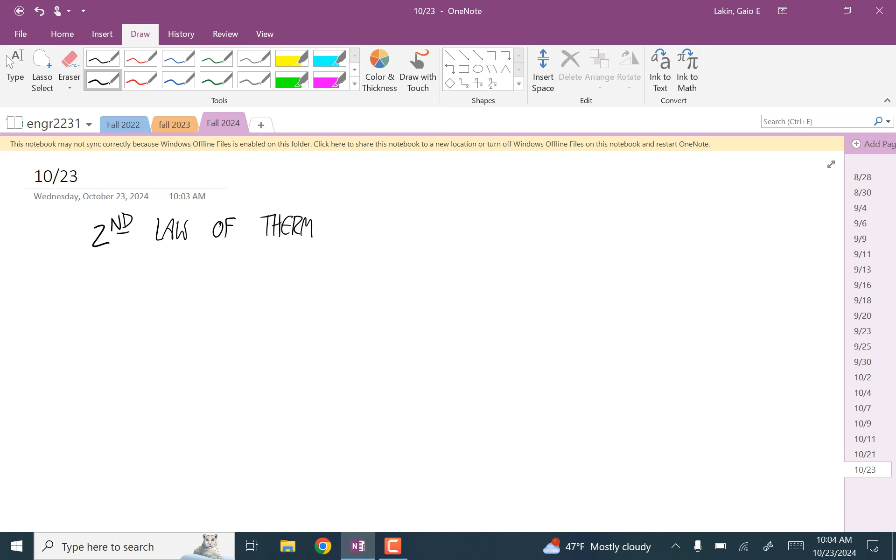So guess what we're starting today? The second law of thermodynamics. And this is a cool one. Some parts of it aren't that cool, but the parts involving entropy are. And this is going to give us two new, I guess, abilities, things we haven't been able to do with the previous approaches.

The first one is calculating the efficiency of cycles. And the second one is, it's funny that we haven't been able to do this, maybe you haven't thought about it this way with conservation of energy before, but this gives us the ability to calculate the direction of processes.

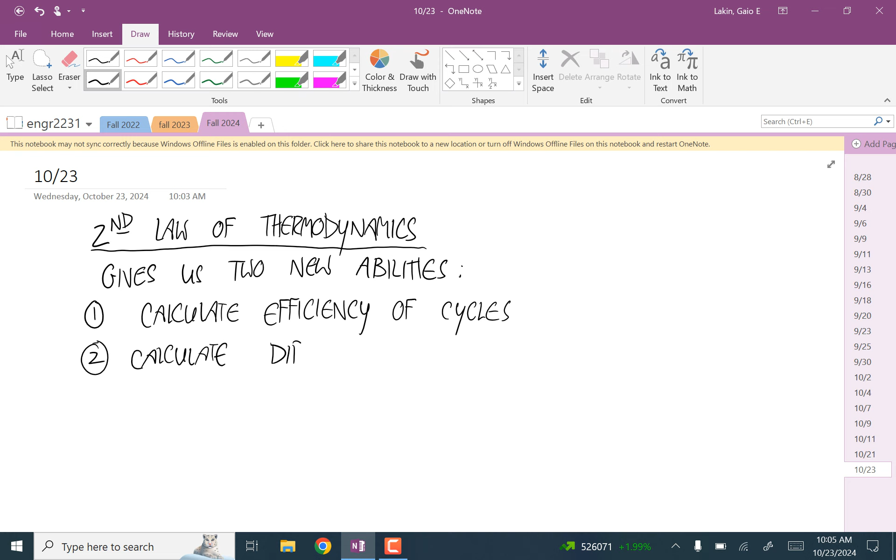Because we've just been given it. Yeah, so I suppose it wouldn't matter either way, right? Well, so like if you think of a simple conservation of energy problem, like somebody on skis without friction, skiing down a hill, you go through conservation of energy and calculate their speed at the bottom of the hill. But we don't actually, we're just told they start at the top and finish at the bottom. There's nothing about it that says that. And actually, we could use the exact same equations to say, what if they're going this fast at the bottom? How far up the hill can they get? So there's nothing to specify this happens first and this happens second.

The second law of thermodynamics is going to give us that ability. With the ski thing, it really doesn't matter, it's the same equations. Well, it turns out that if you could use conservation of energy to say, okay...

Say you take a hot lump of metal and you put it in some cold water. You can calculate what the equilibrium temperature of the metal and the water are going to be. But nothing we've talked about so far says that it starts with them at different temperatures and ends with them at the same temperature. Intuitively, we know that's the case, but as far as conservation of energy is concerned, the first law of thermodynamics, it's just as possible for you to put these things at different temperatures together and for them to separate into a hot thing and a cold thing, even though we know that can't happen. Well, the reason that it doesn't happen is the second law of thermodynamics.

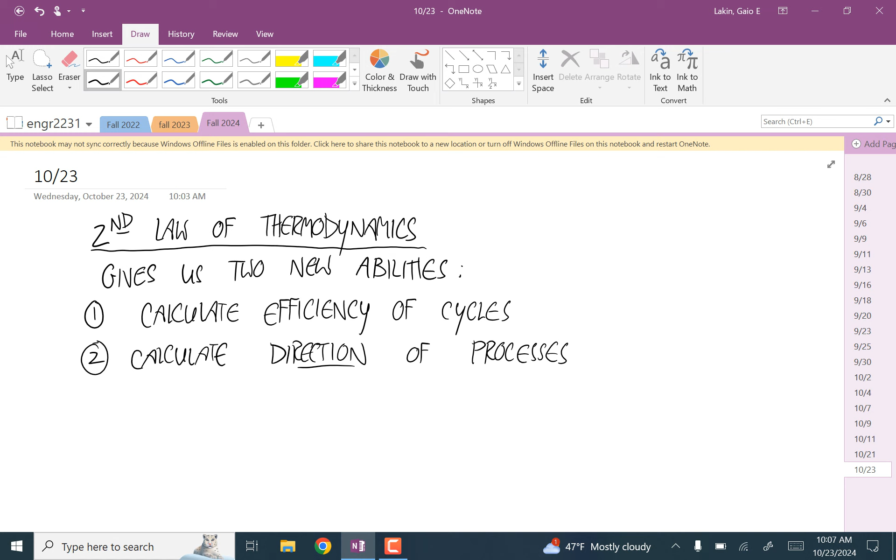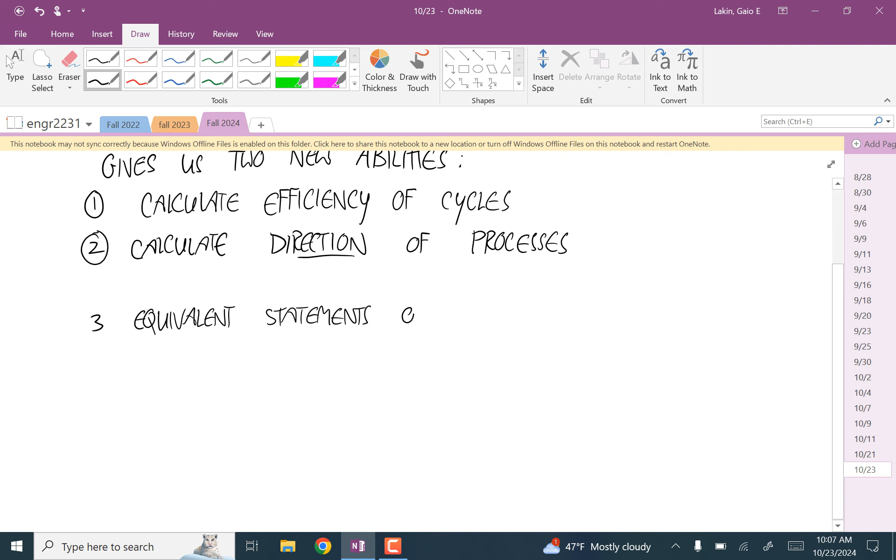There are three equivalent statements of this law. So there are three equivalent statements of the second law. The first one is the most intuitive, and we're not going to use it exactly, but you can show, and it's not too complicated, but I'm not going to go through it, how this is equivalent to the other two. But this first one is called the Clausius statement of the second law.

And this one says that heat, remember heat is energy, it's a change in energy due to a temperature difference, and this says that heat only moves spontaneously from a high to a low temperature.

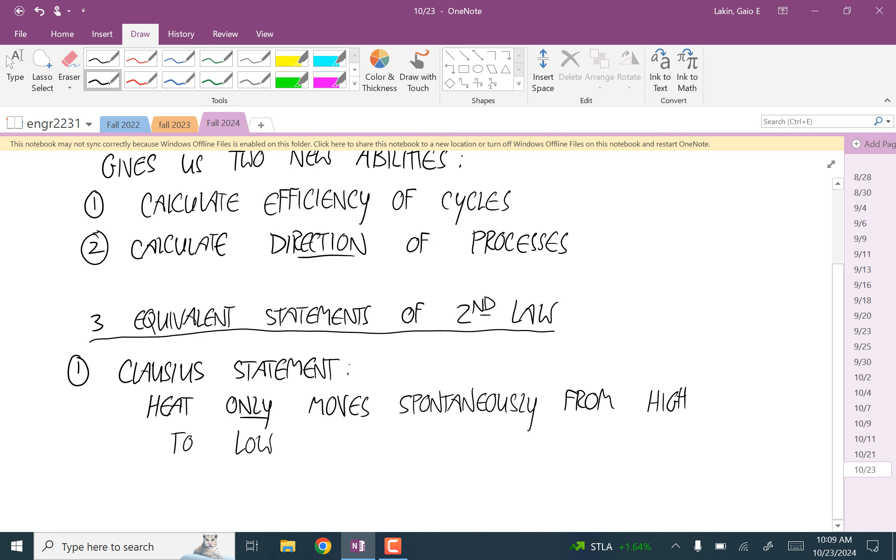Okay, so this is totally intuitive. I mean, if you put your hand against a cold window, the reason it feels cold to you is because energy is leaving your hand going towards the window. If this Clausius statement wasn't true, you could sometimes put your hand on a cold window and it would feel hot because energy was going from the window to your hand and the window was getting colder. Okay, so this is totally intuitive, totally makes sense.

You would have been able to make this statement yourself, so I don't know why Clausius is so great. But the only reason I bring this up is kind of to ground you to the other ones. This is all the other ones are saying, they've just figured out some cool, different mathematical ways to approach it that end up being super useful. But this is the intuitive one.

Clausius, a physicist? No, I think he's the guy who brings us Christmas presents, isn't he? Romans said that. Santa Clausius, the Santa Clausius statement.

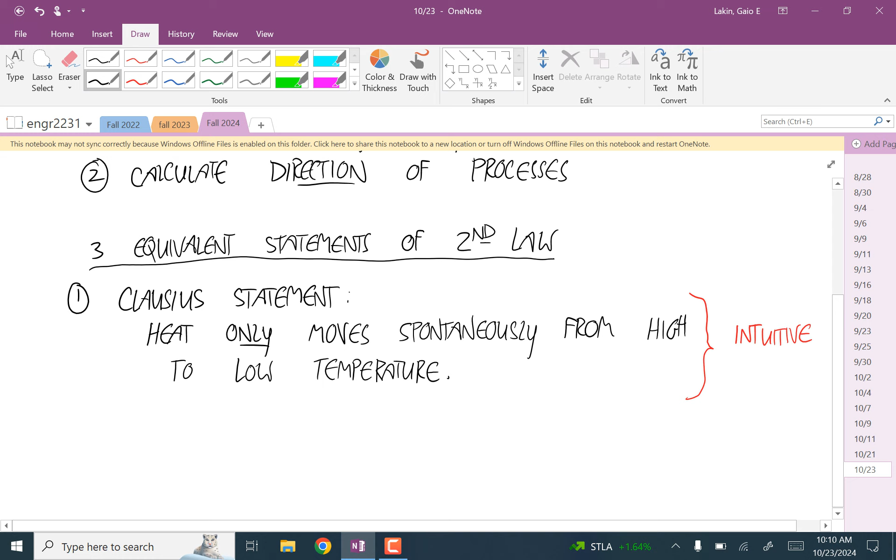But now we'll get to the two that actually have mathematical uses for us. The second one is the Kelvin-Planck statement. Planck.

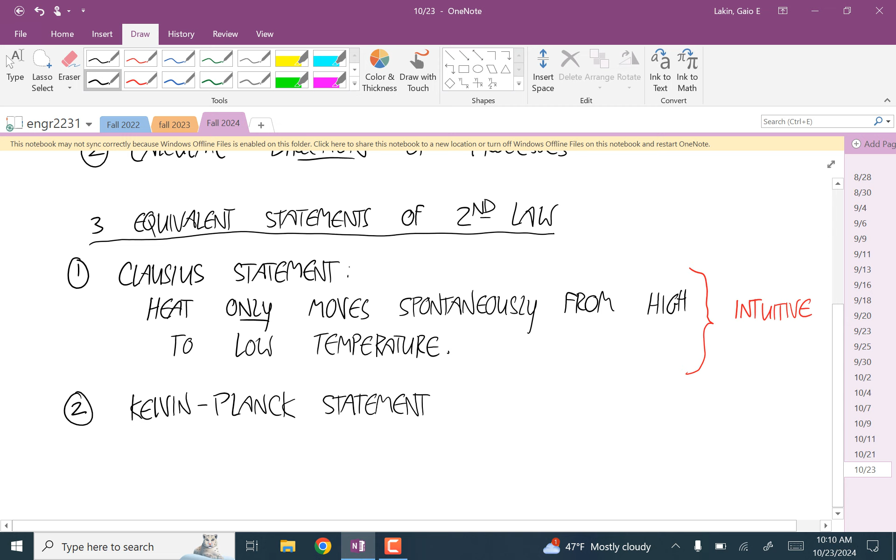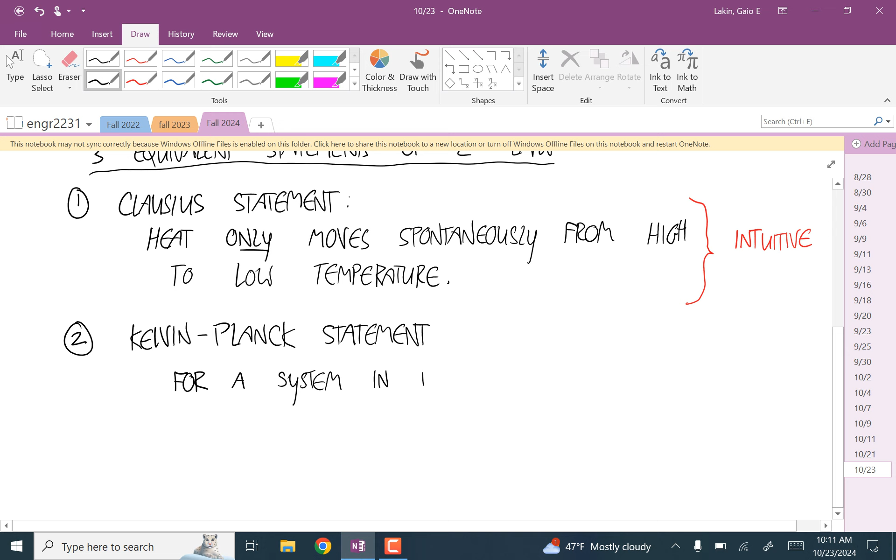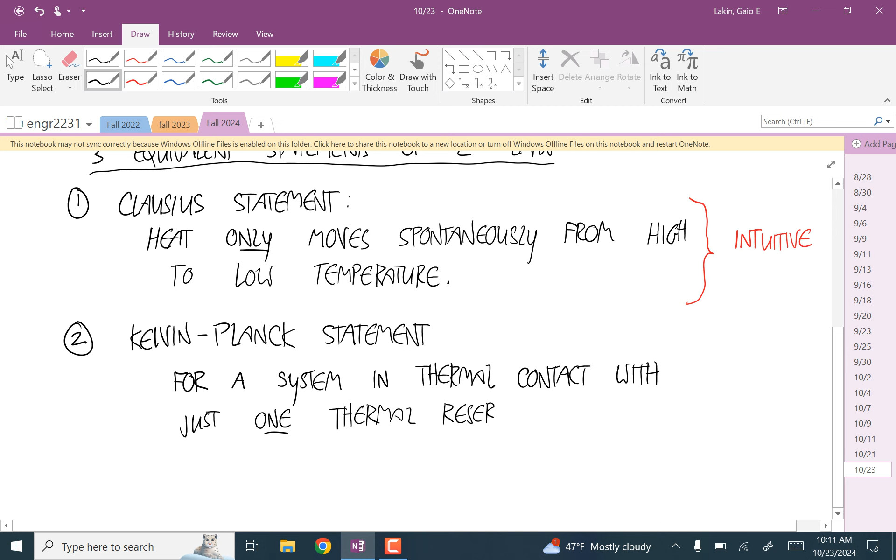And this one says, okay, so this goes, there's a big jump in the complexity of what this is saying compared to the first one. But for a system that's in thermal contact with just one thermal reservoir, the work produced by the system over any cycle is less than or equal to 0.

Okay, so let's think about what this means. So a thermal reservoir, you can think of that as like a giant ice bath that's keeping something at a low temperature, or you can think of it as a boiler with a fire burning that's sort of an endless supply of energy as long as the thing stays below that temperature. So for the purpose of this, let's think about this thermal reservoir as being a boiler, like a fire. And what does it mean for W for the cycle to be less than or equal to 0?

So think about the sign convention of W. If the system is able to do work on the surroundings, then that would be positive.

So what this is saying is, if all you have in your power cycle, in your power plant or whatever, your engine is a hot engine, all you're doing is shoveling coal into it, you can never get that to be a cycle and still do work. You can never get it to return back to its starting state and still be outputting work. You can get it to return to its starting state, but then you have to do work on it.

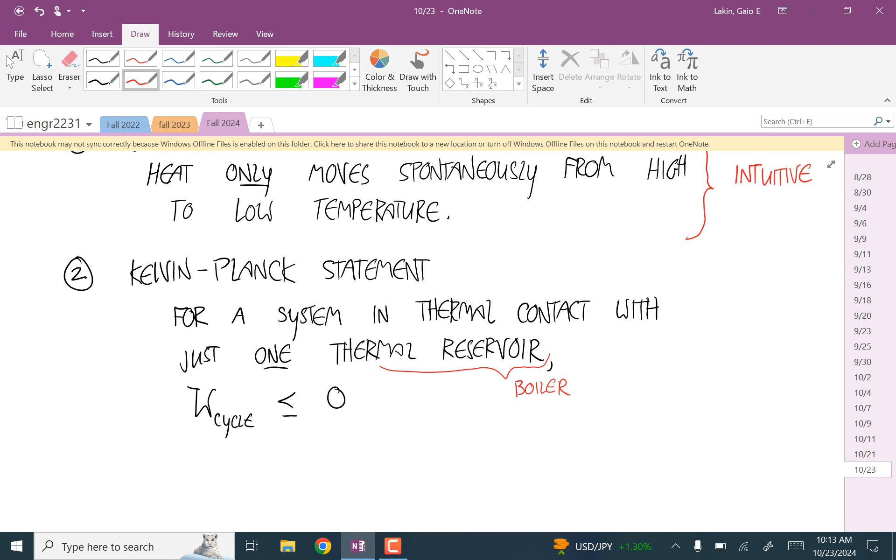So is that basically saying the efficiency can only ever be 100% maximum? Is this sort of a statement saying you can't have perpetual motion? Or is it a little stronger than that?

It's actually saying, so here's how to think of this: you can't have all the heat from a power cycle go into work, go into producing work. Some has to be lost in exhaust.

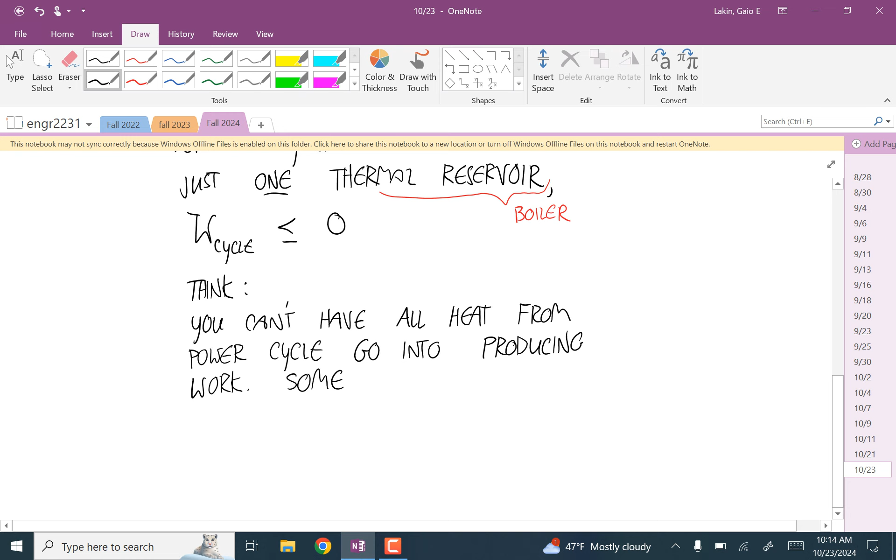So how does it say that? Well, this exhaust is, think of this as a necessary second thermal reservoir, because heat is always being lost to the surroundings. It's actually saying even if you have perfect efficiency, you can't run a power cycle without using a cold reservoir to sort of attract the heat flow, is basically what it's doing. You can't just pump energy into this system through heat and have it all produce work with perfect efficiency. You have to get that heat moving in a certain direction by also having a cold thermal reservoir.

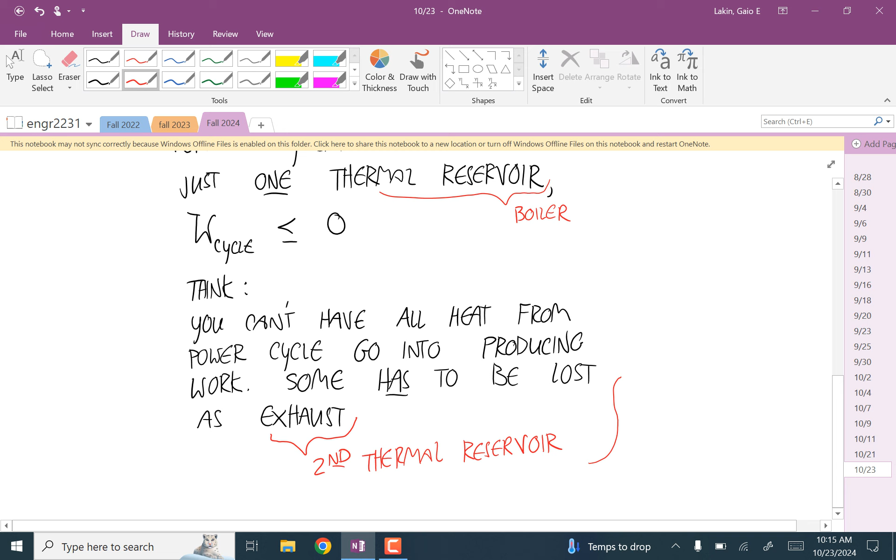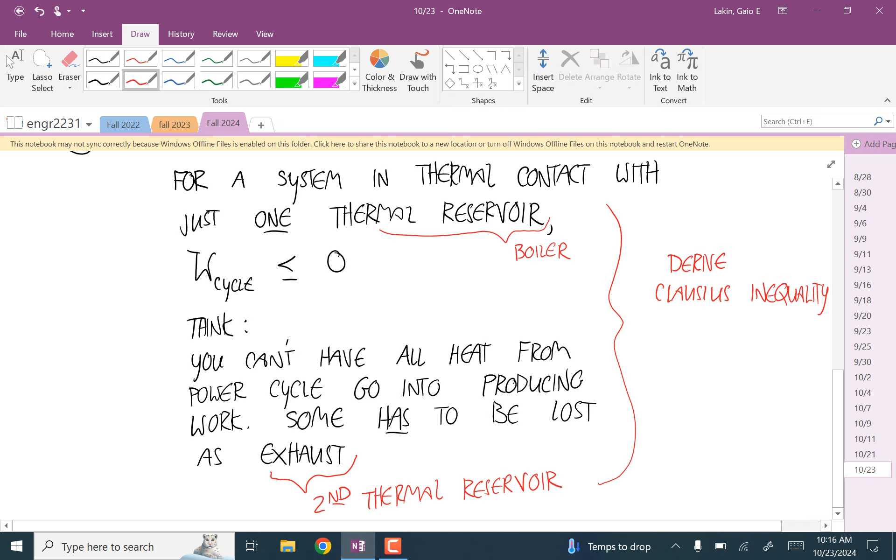And what are we going to use this for? The benefit of this statement is we're going to use it to derive what's called the Clausius inequality. This is a pain, kind of, but if you had to think about which one of these statements of the second law of thermodynamics you're going to derive the Clausius inequality from, you would certainly think it was going to be the Clausius statement, but it's not.

So just be aware of that. The Clausius inequality and the Clausius statement are totally different things. It follows with thermo logic. And then we're also going to use this to derive the entropy statement. Well, the definition of entropy, and the entropy statement of the second law.

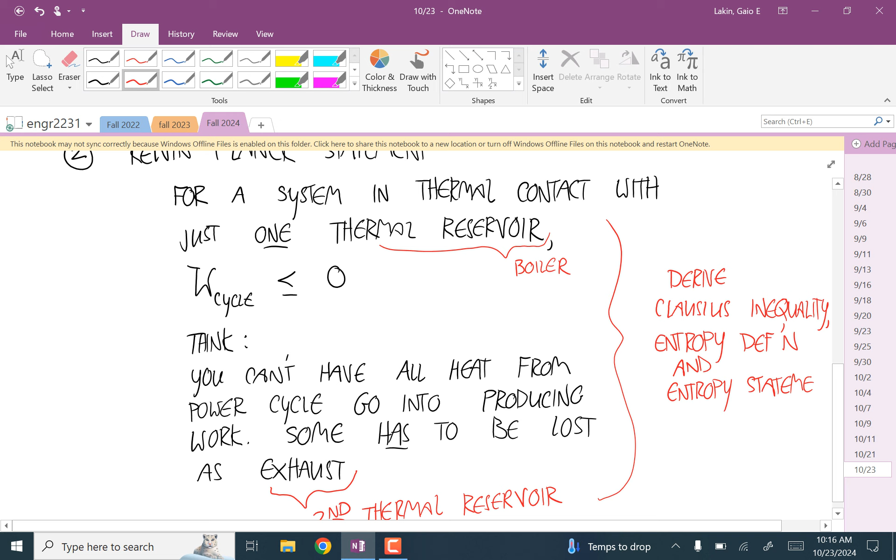And then the third one of these is the entropy statement, and that says that for a closed system, meaning no energy flow across the system boundary, the change in entropy is greater than or equal to 0.

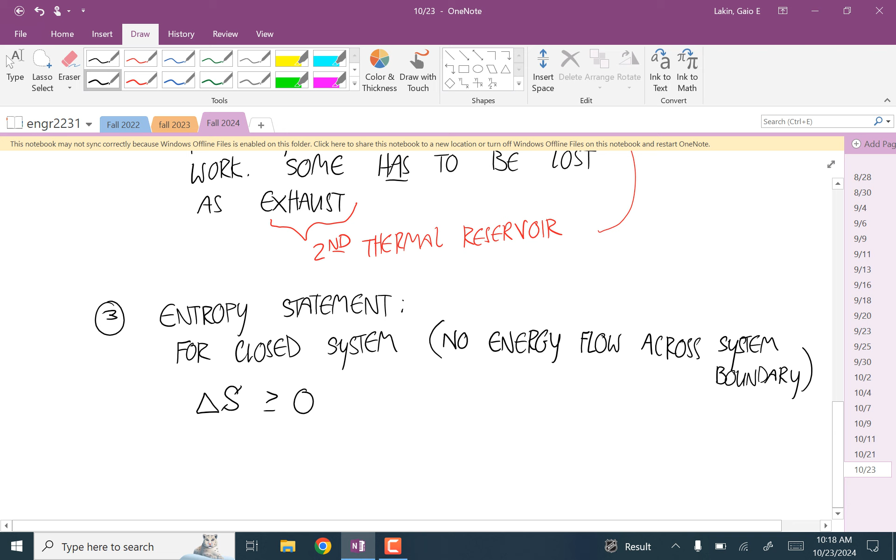Or another way to think of that is the universe is a closed system. So if you think of all the changes in entropy in the universe, entropy is always increasing. And so a lot of what we're going to be doing in this section is just making sense out of what entropy is, connecting the math of the mathematical definition of entropy to kind of intuitive ideas and stuff like that.

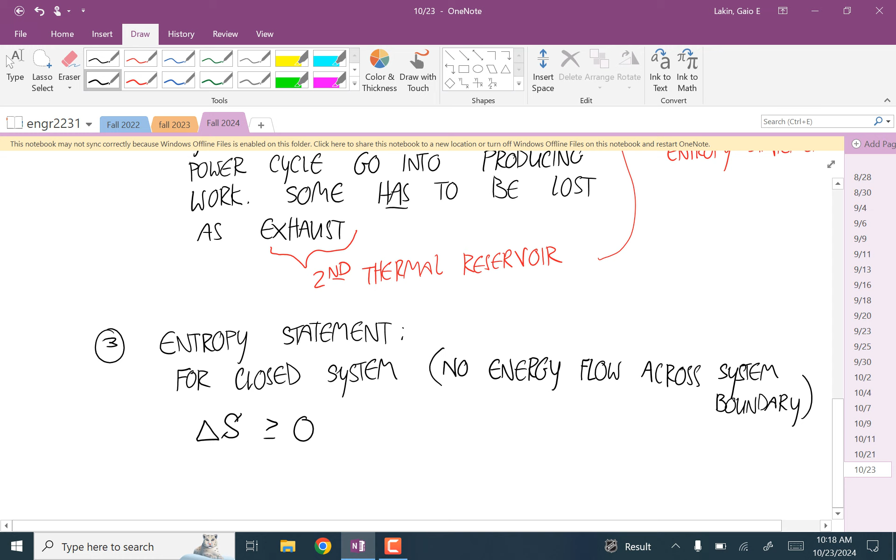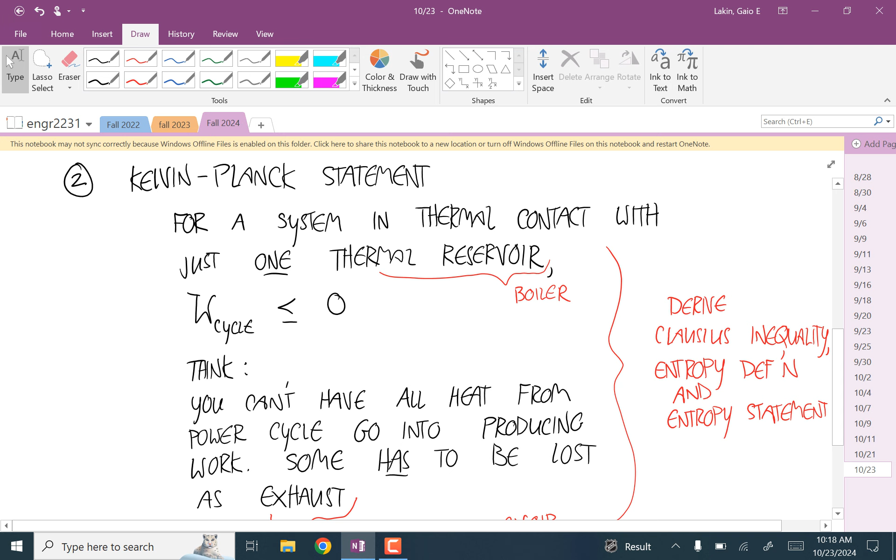And then just a little clarification on 2: so we have this heat pumping into a system, but we have to tell it where to go by directing it, and not directing it, like we're using some of it. I think that's a reasonable way to think about it.

But does that just happen now? Or, I mean, another thing, does it just kind of happen naturally when you have a system? Yeah, I mean, we'll see. It's easy to figure out how to use a cold reservoir to make this happen. It's not super tricky or anything, but yeah, the key is that you have to have both the hot and the cold reservoirs in order to harness this energy.

And does it have to be a reservoir of fluid? No, there are different ways you can have it. It's really just a reservoir — it just means that if you're transferring energy from a high temperature reservoir to your system, or transferring energy from your system to a low temperature reservoir, the key thing that makes it a reservoir is it's big enough that the temperature doesn't change noticeably from that. So you're not watching those two things change temperature.

So that's like a boiler — you just keep shoveling coal in or whatever. They don't really use coal much anymore, but I'm just picturing the guy in the train. But they just keep shoveling coal in there and the temperature stays the same, even though it's constantly pouring out energy into the train.

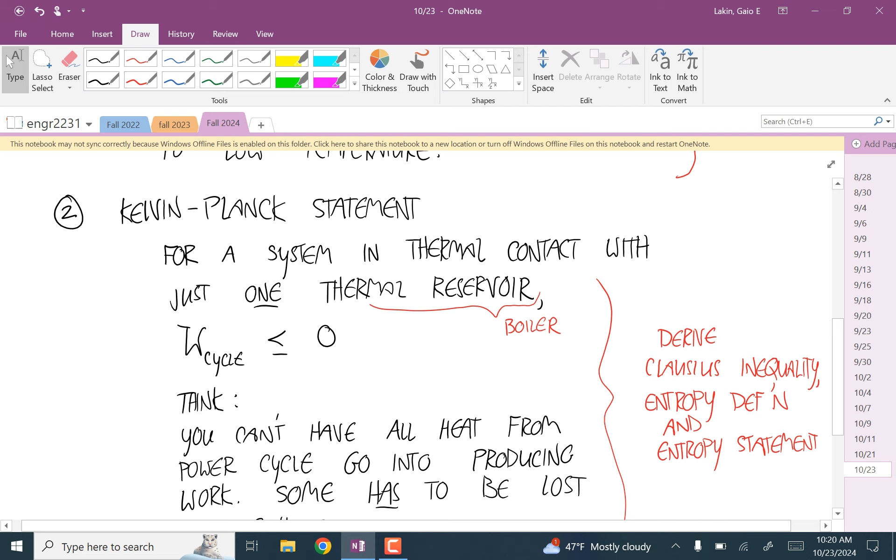In that case, the reservoir would be the atmosphere — the cold reservoir. Yeah, that's right.

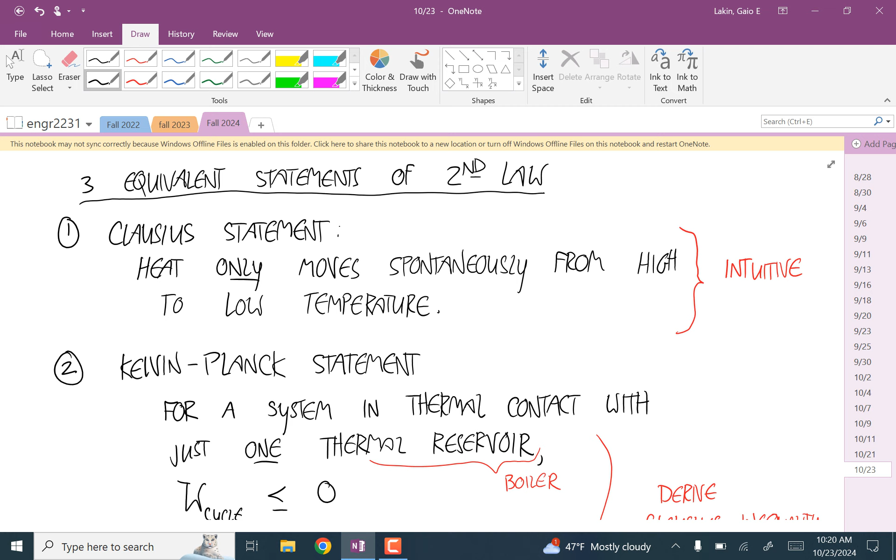Okay, so we got these three statements. The Clausius statement is just kind of to ground yourself on. Remember that even though it seems simple and the other ones seem complicated, they're saying the same things, and that's mathematically provable.

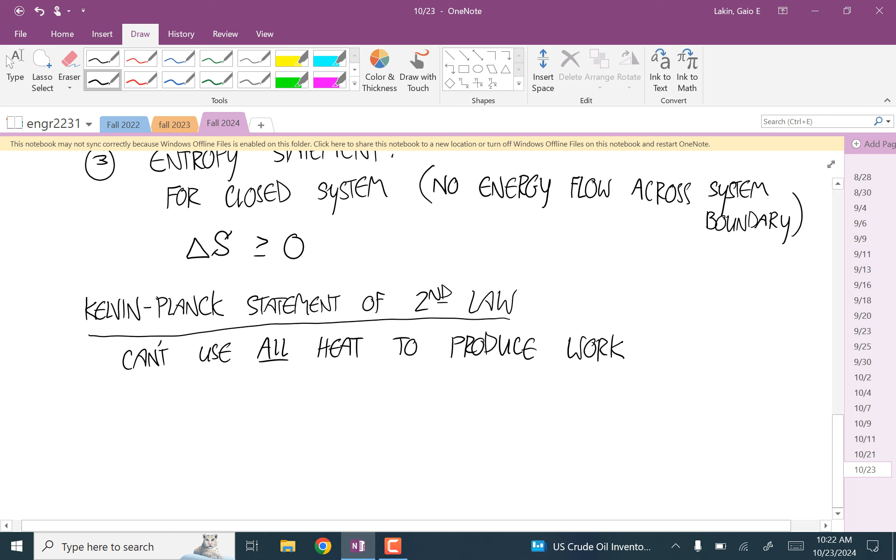But we're going to jump right into starting with the Kelvin-Planck statement. And this is the one we were just talking about. Another way to think of it is you can't use all the heat that you put into a system to produce work. So you might think, okay, the maximum efficiency that you could have with a power cycle is however much heat you put into it, that's how much work you get out of it. That sort of makes sense in a way, but this says no, the ceiling for efficiency is lower than that. And so we're going to be talking about calculations about how much lower and stuff like that.

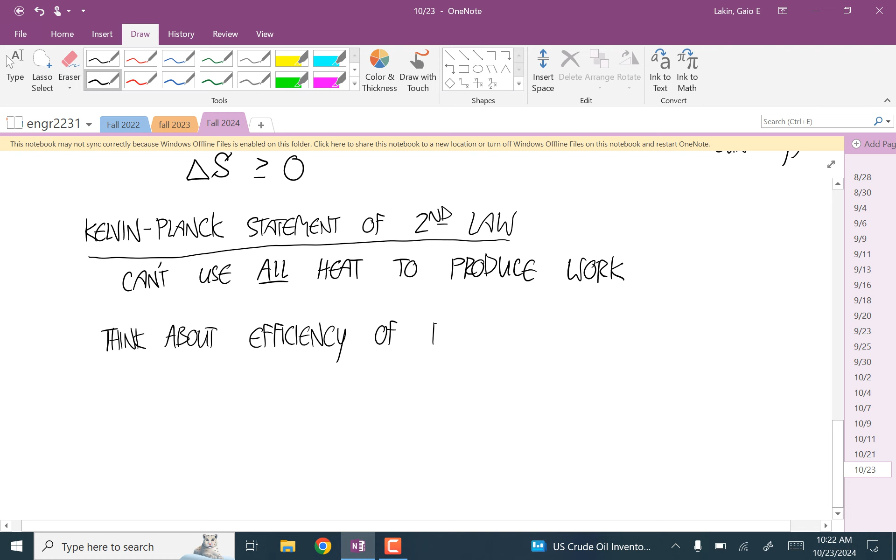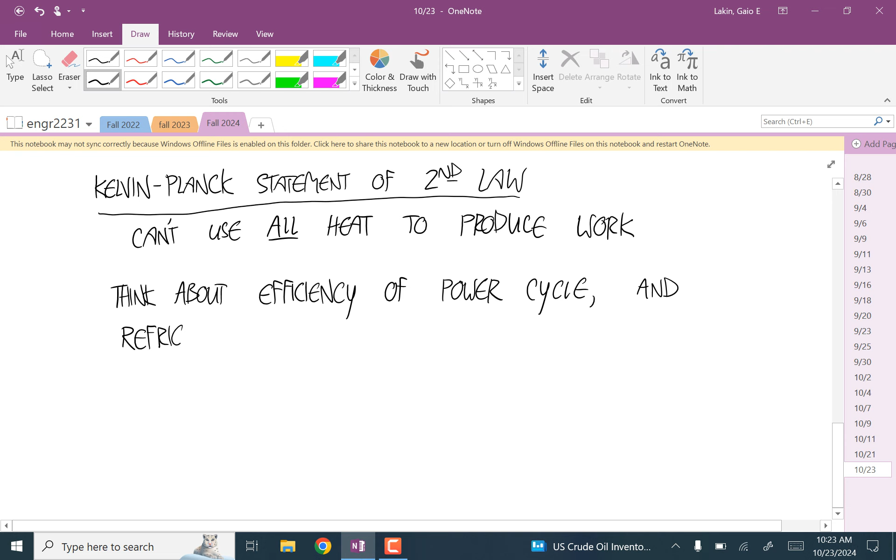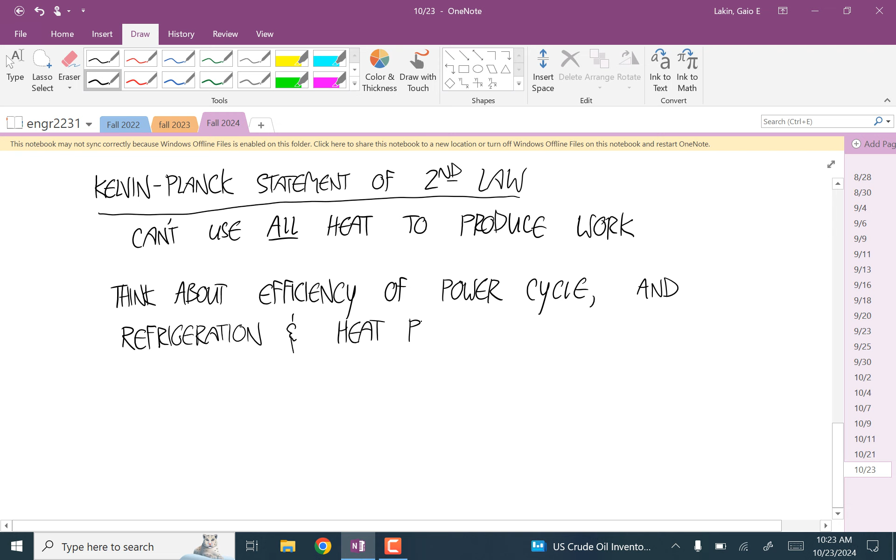Okay, so let's think about efficiencies of systems. So I'm going to draw a power cycle and a refrigeration cycle. So we're going to think about the efficiency of a power cycle, and a refrigeration, and a heat pump cycle. The goals of refrigeration and heat pump cycles are not the same, but the functioning of them is the same.

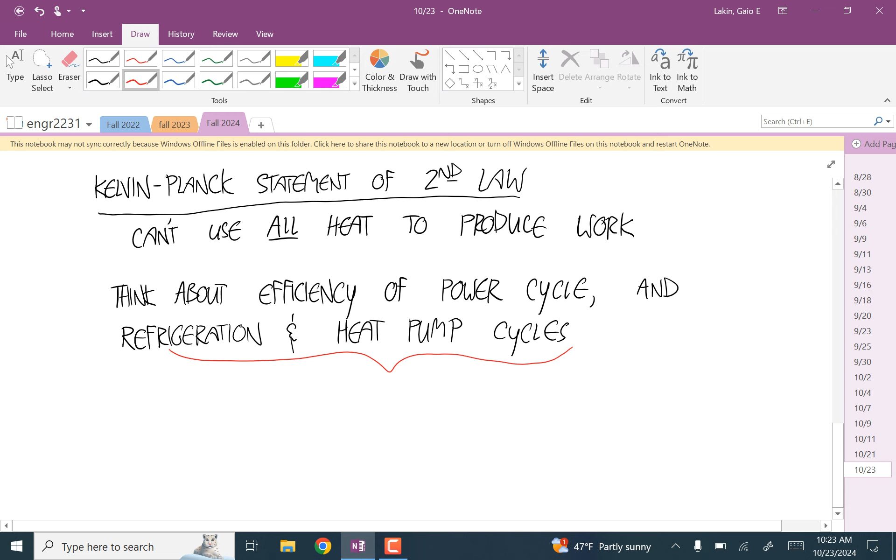And so I'm going to sort of lump these two together. A heat pump cycle and a refrigeration cycle are really the same thing. It's just a matter of where you put your important stuff compared to this cycle. Like if you wanted to use a refrigerator as a heat pump, you could have the refrigerator open to the outside and be sitting behind the coils behind the refrigerator, and then it's a heat pump. And if instead you want to keep your vegetables cold, you put the coils somewhere where you don't care about it, and you keep your vegetables in the other part. So it's the same thing.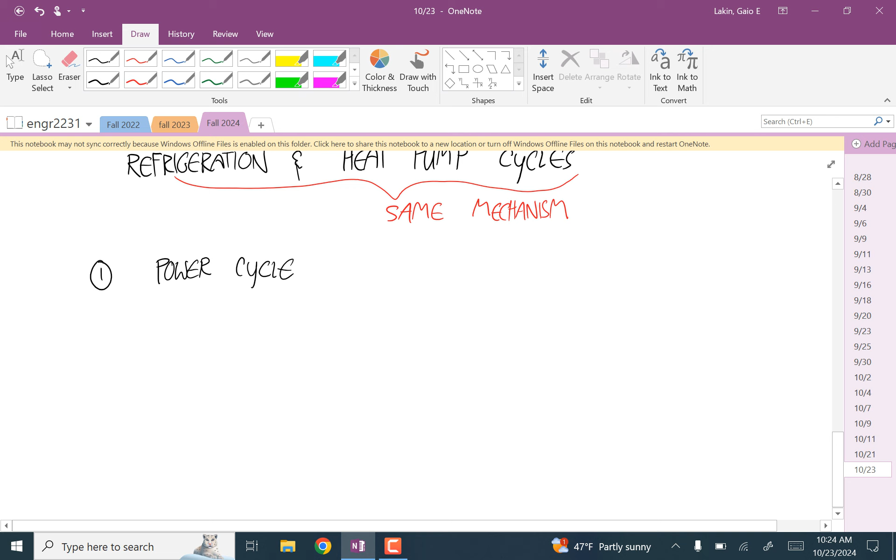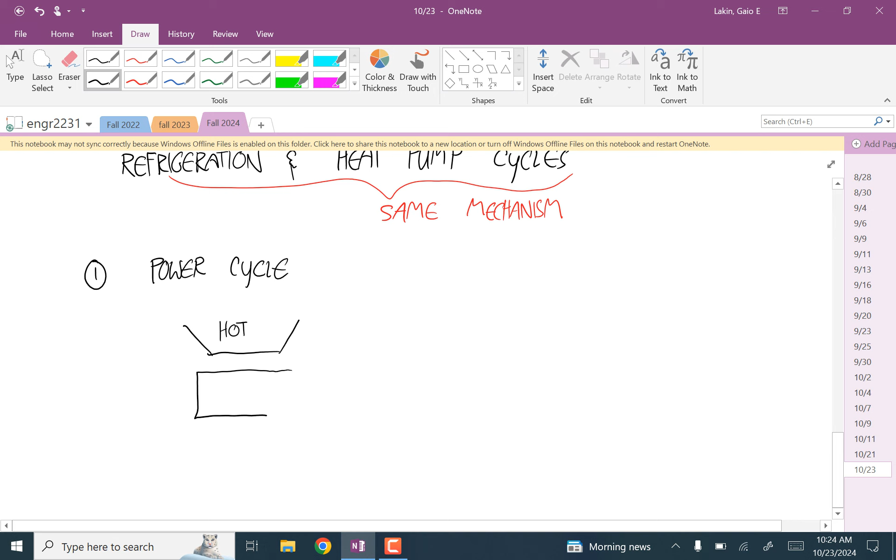So first, a power cycle. Works like this. You have a hot reservoir, you have your system, and then you have your cold reservoir. And heat is transferred this direction from the hot reservoir to the system, and I'm going to call that QH. And then heat is transferred from the system to the cold reservoir. I'm going to call that QC.

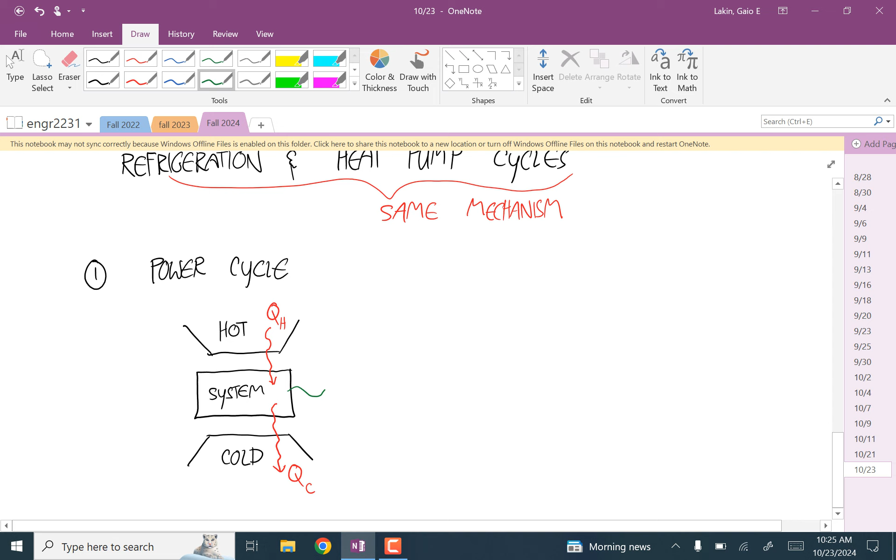And these directions are telling us sort of a new sign convention for thinking about this stuff. Notice that QH, positive QH means energy is going into the system. Positive QC means energy is leaving the system. And then work is produced. So that's sort of the overall functioning of a power cycle, an engine or a power plant.

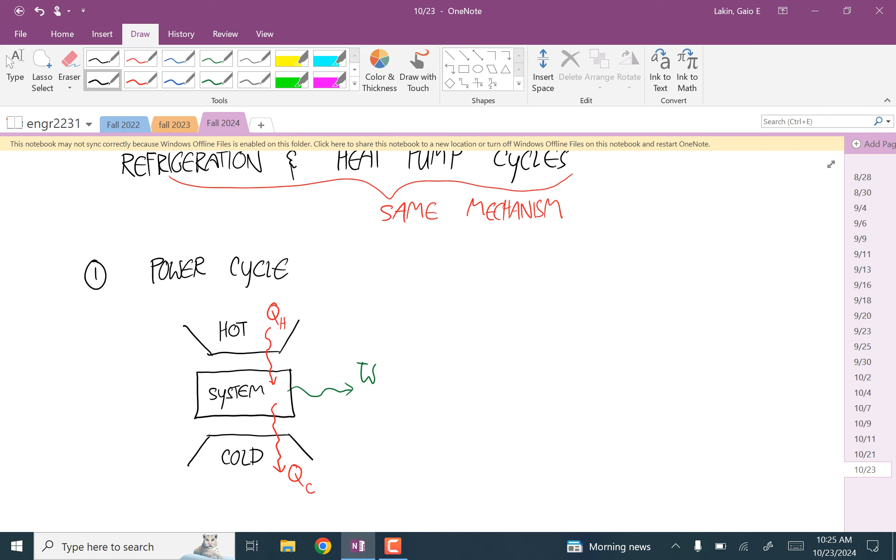And the first law of thermodynamics. So since this is a cycle, we know that the change in energy is equal to 0. And so we can write this as the energy coming into the system has to be balanced by the energy leaving the system. So the first law says that QH is equal to W plus QC. And you can rearrange this as W is equal to QH minus QC.

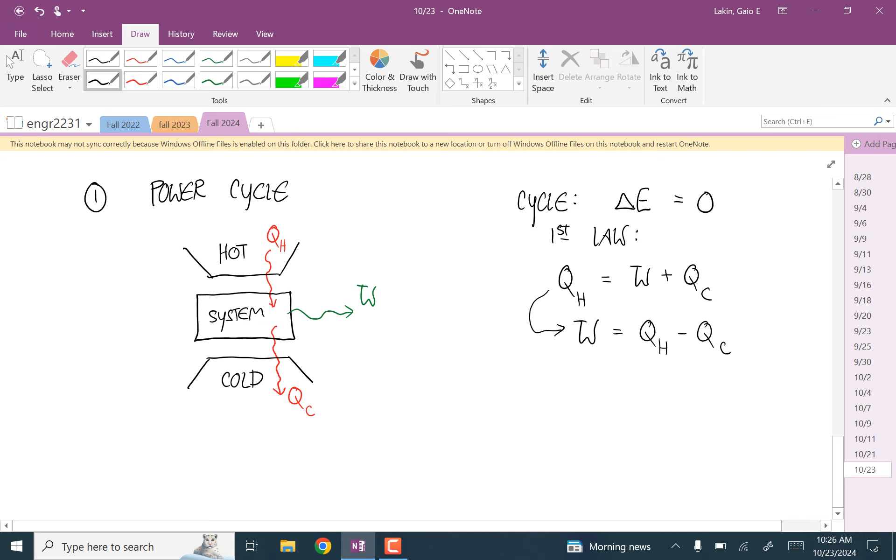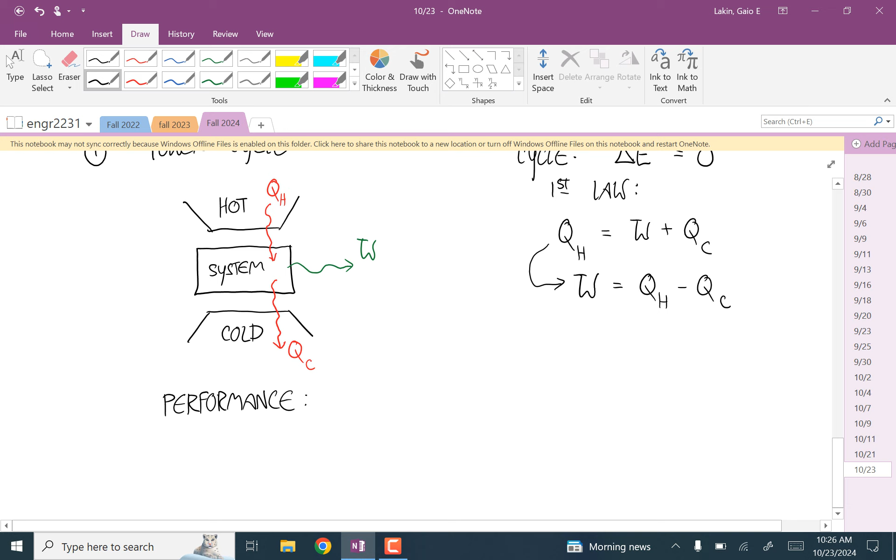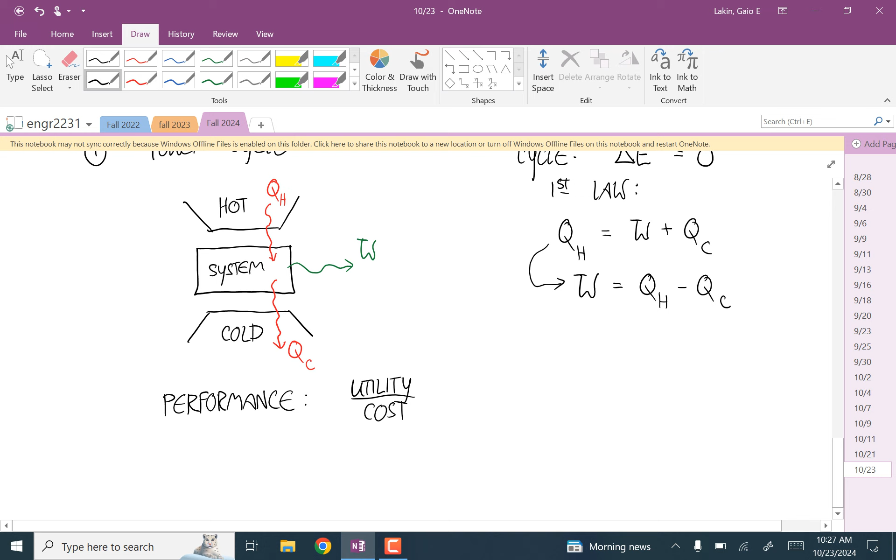And now let's say we wanted to evaluate the performance of a power cycle. We'd think of this as the utility divided by the cost. Okay, that's a reasonable way to define the performance. And so we're going to call this calculation the efficiency of a power cycle and give it the Greek letter eta. It's like a scripty N.

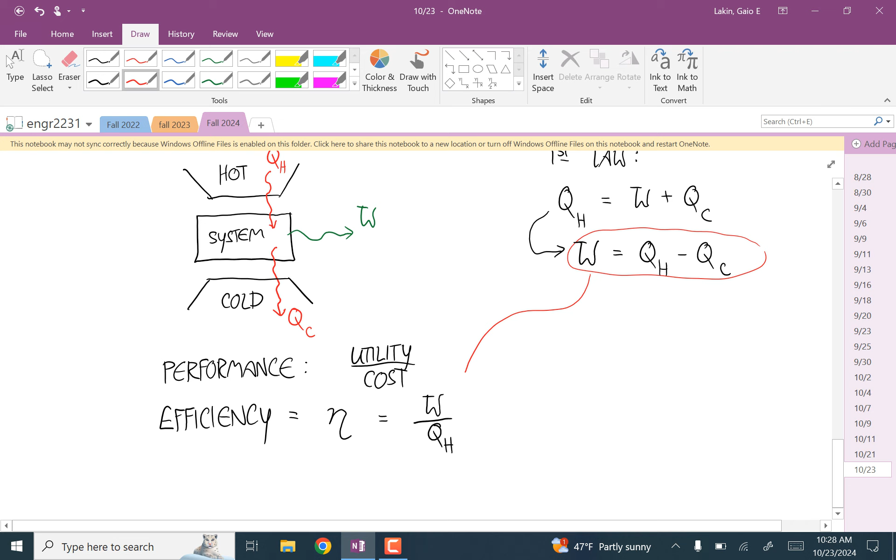So if we're thinking of what you get out of this, the utility over the cost - what's the thing that you're trying to maximize in a power cycle? What are you trying to get the most of? Work, exactly. And what's the thing that you're doing in order to get work? Producing heat. Yeah, you're putting heat in, you're shoveling coal in there. So the efficiency is work divided by QH. And then you can substitute this in for the work and rewrite this as QH minus QC all over QH. Or in other words, 1 minus QC over QH.

Okay, that actually makes a lot of sense. Yeah, it's just, you put in, you get out.

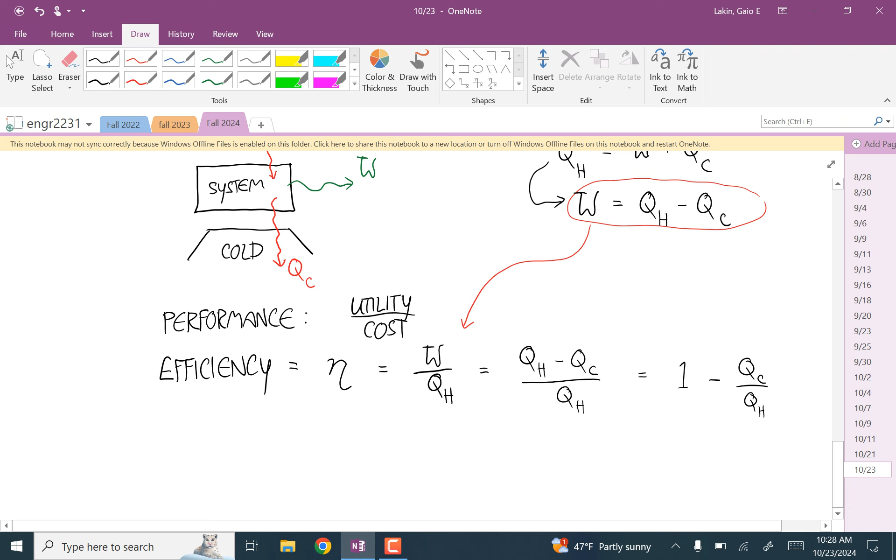But what's interesting here is we're still assuming everything is working perfectly. We're not considering any heat lost in places we don't want to lose heat. We're not considering any friction in the system or anything like that. And already we have a limit, even on this sort of perfect power cycle, on how much work we can get out for a certain amount of heat.

You can see that you could have perfect efficiency if your cold reservoir is absolute zero. Well, that's not very realistic, right? This is like superconductors. Well, yeah, you could, but to make something a superconductor is very, very expensive, you know? And so you're not really going to make an absolute zero thermal reservoir.

So barring that, if you're given the amount of energy that's leaving in the exhaust and the amount that's coming in at the boiler, you already have a pretty stringent limit on what your total efficiency can be.

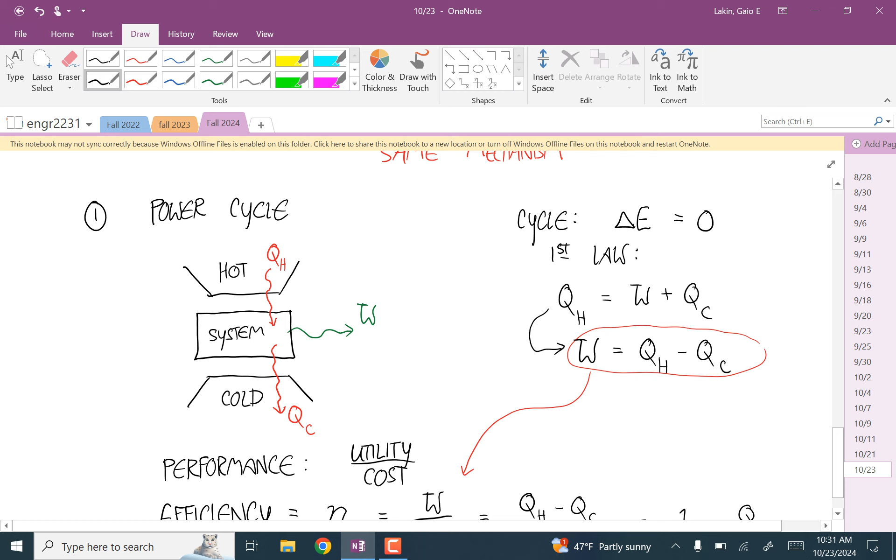Okay, so for now we just have this definition of efficiency, and this is something we're going to use a lot. This is the first law form of the cycles. So get used to thinking about it this way: you have the diagram of what's happening, and from that diagram you can jump to this relationship between the heats and the work. And then the refrigeration cycle, we're going to think about it the same way, but it looks a little different.

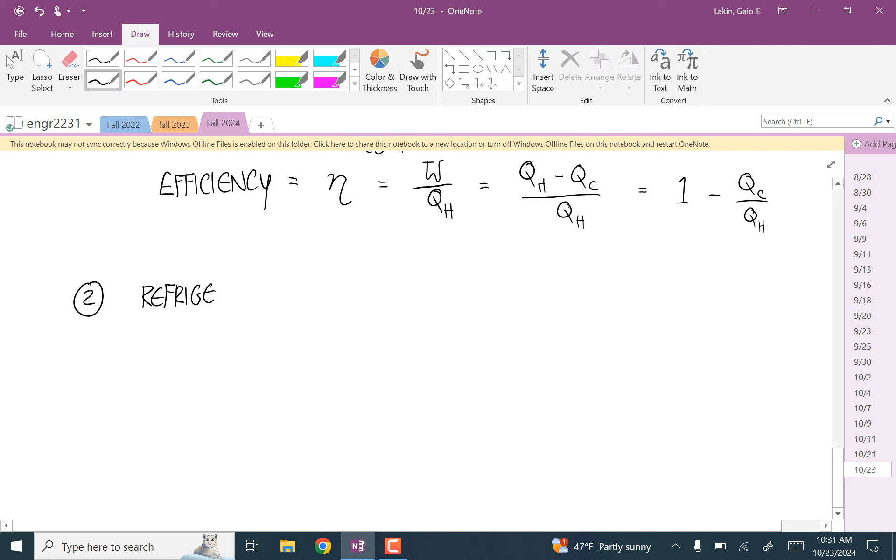This is also a heat pump.

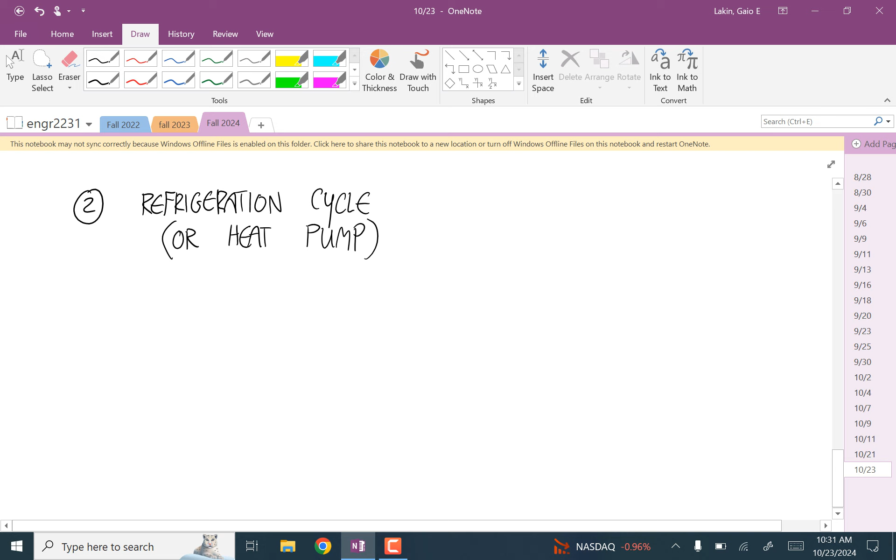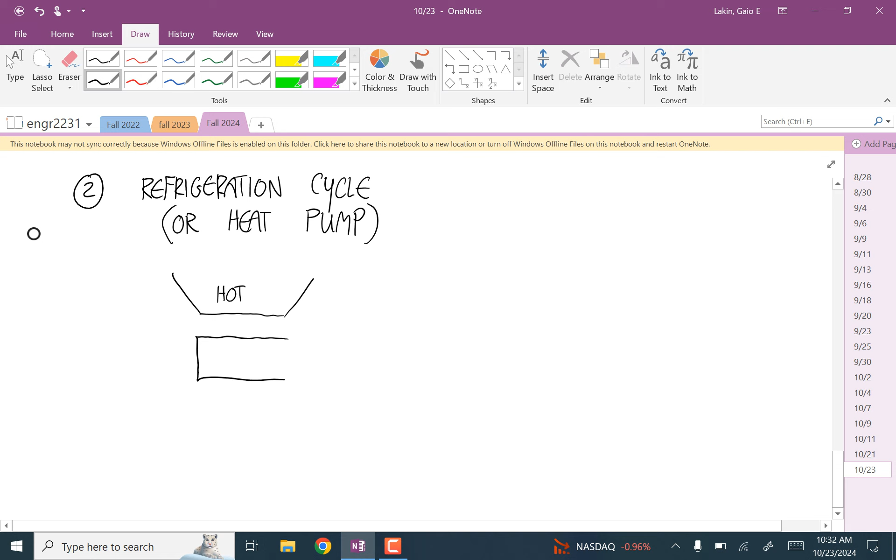So for a refrigeration cycle or a heat pump, we still have a hot reservoir. We have our system, which is the refrigerant. And then we have the cold reservoir. And what are we trying to do here? Well, for a refrigerator, this would be the room, and this cold reservoir would be where you keep your popsicles.

What we're trying to do is move heat from the system to the room, to the hot reservoir, and I'm going to call that QH. And we're trying to move heat from the cold reservoir to the refrigerant, so that's our QC. And in order to make this happen, we're doing work with a compressor. This thing is plugged into the wall and the electricity is powering a compressor, so this is the work coming in.

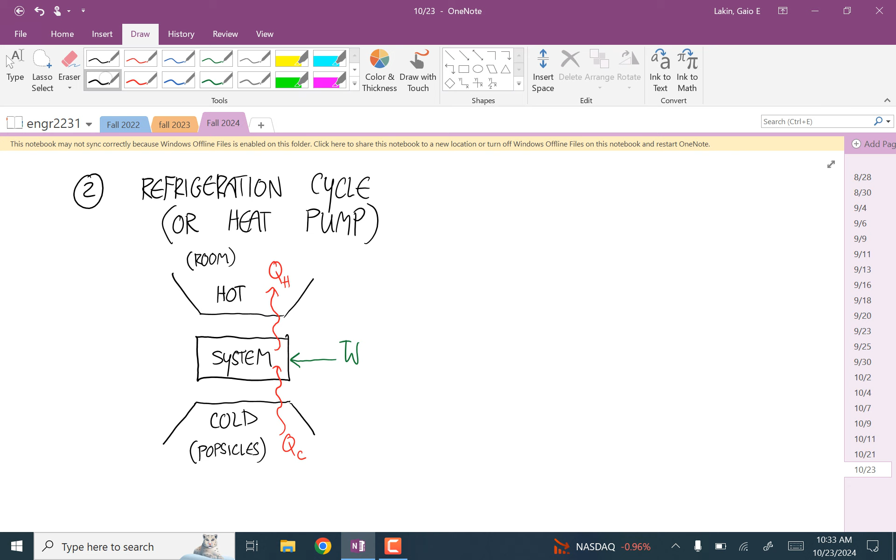So we'll analyze this again using the first law. Again, this is a cycle, so there's no change in the energy of the refrigerant over one cycle. And so the first law says: all the things going out, that's QH, that's the energy going out. And the stuff coming in is W plus QC. So everything's going the opposite direction, but that first law equation ends up looking the same as it did for the power cycle.

And again, I'm going to rewrite this to isolate the work. So we have QH minus QC.

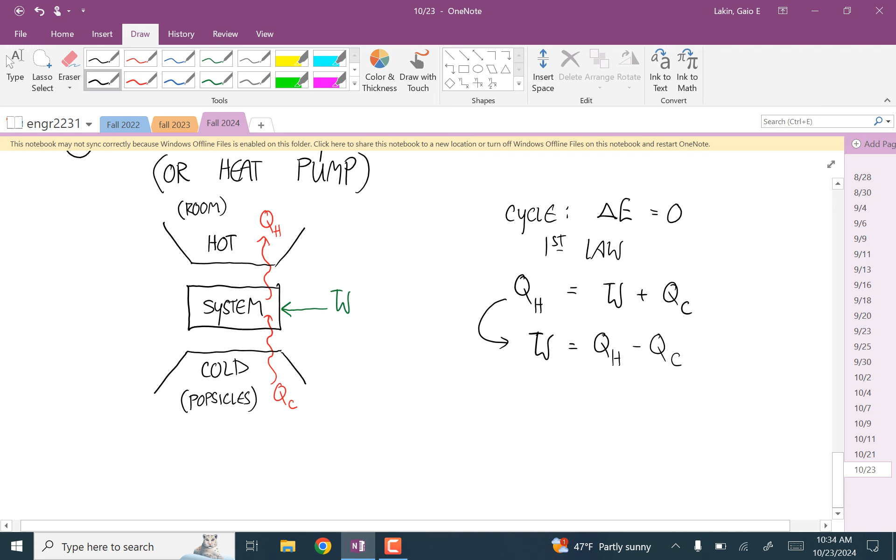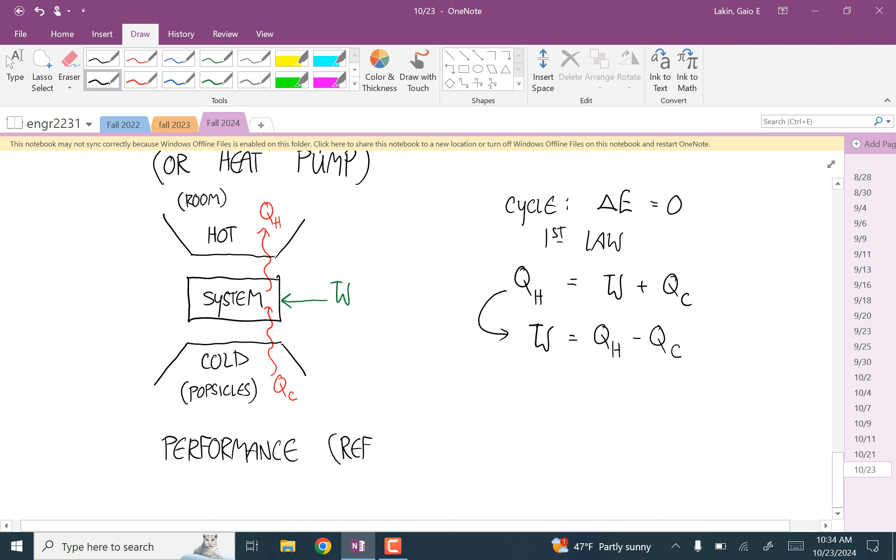Okay, so what's performance for a refrigerator, for a refrigeration cycle? The amount of heat you remove per work. Yeah, that's exactly right. So we're going to call this the coefficient of performance, because it can get bigger than 1, so calling it efficiency doesn't make a ton of sense anymore.

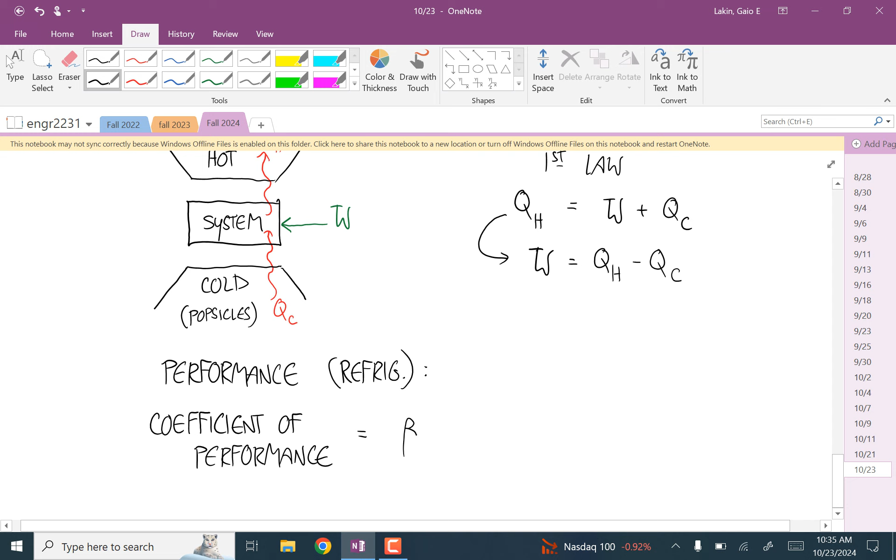Coefficient of performance, and we're going to give that the Greek letter beta. And exactly like you said, that's perfect: that's the heat that we remove from the popsicles, QC, divided by the electricity we need to power the compressor. And then if we substitute in our expression from the first law, we can write this as QC divided by the quantity QH minus QC.

But they still call this efficiency in the real world, like this is your Energy Star rating.

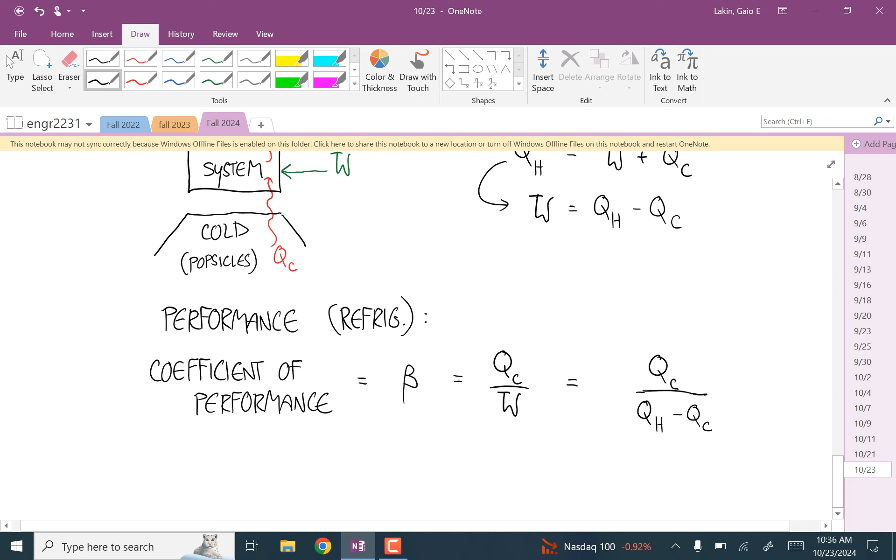I do not know, that's a good question. I think colloquially, yeah, at least because I looked it up - I have a heat pump in my garage, and it gives you an efficiency based on the temperature difference between inside and outside. So it's only over 100% efficient until it's like negative 10 degrees, probably.

So remember that these are not for specific systems. So let's look at the refrigeration cycle. This isn't talking about a specific one where you've put effort into keeping heat from leaving through a gap, or how to insulate it - you do all these things to improve the efficiency of a refrigerator. This is simply saying: imagine a perfect refrigeration cycle, but the only constraint is that we know this much energy is coming in here and this much is leaving here. There are no inefficiencies anywhere in it.

Here's the coefficient of performance. Then you could compare that to the efficiency of your specific refrigerator. I'm guessing that's probably what's reported as the efficiency of what you get out of this box - but this isn't the metric, there's no 100% efficient to compare to. This is the thing I'd guess you compare an actual physical device to, to get an efficiency. Got it. We'll talk about some of that later, not too much yet.

To do that, we'll have to go through the definition of entropy and some stuff like that.

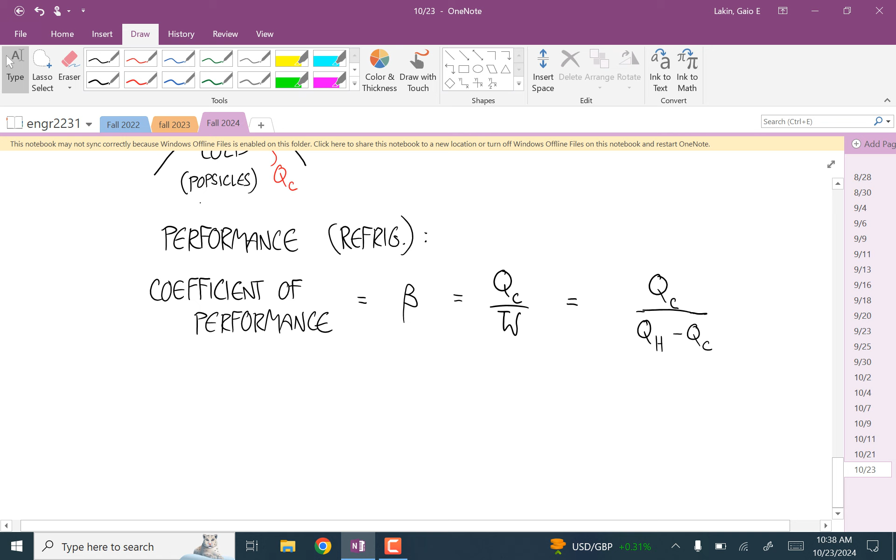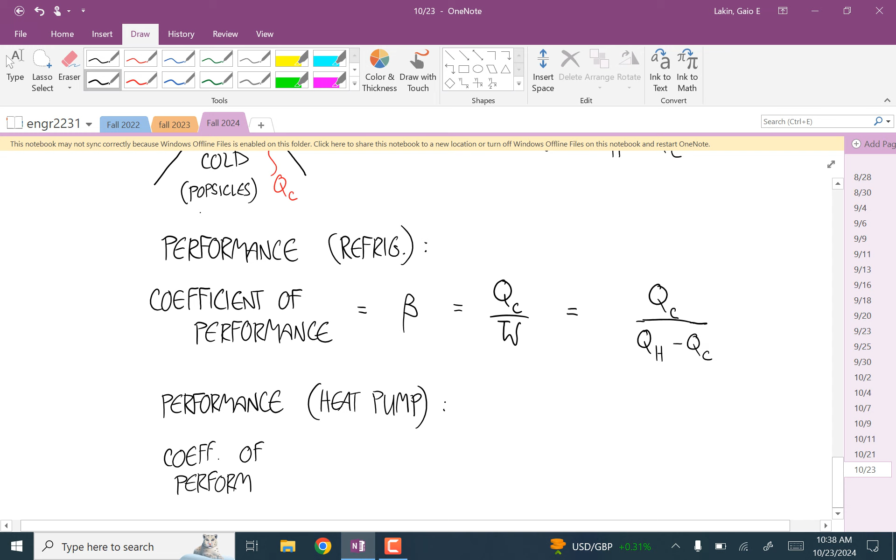Okay, what if instead of this being the room - this could still be the room - but instead of popsicles here, imagine this just being outside. That would be the case of a heat pump. So the performance of a heat pump - this is also called the coefficient of performance - and we'll give this the Greek letter gamma.

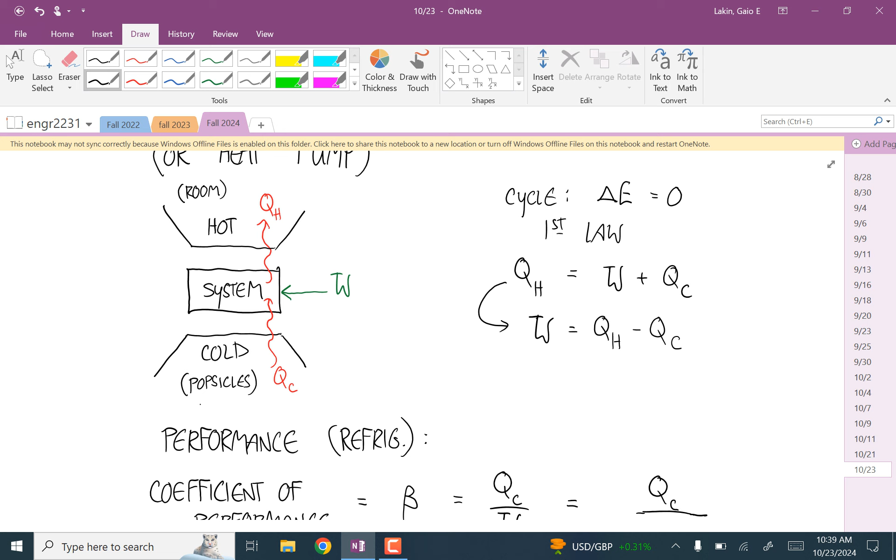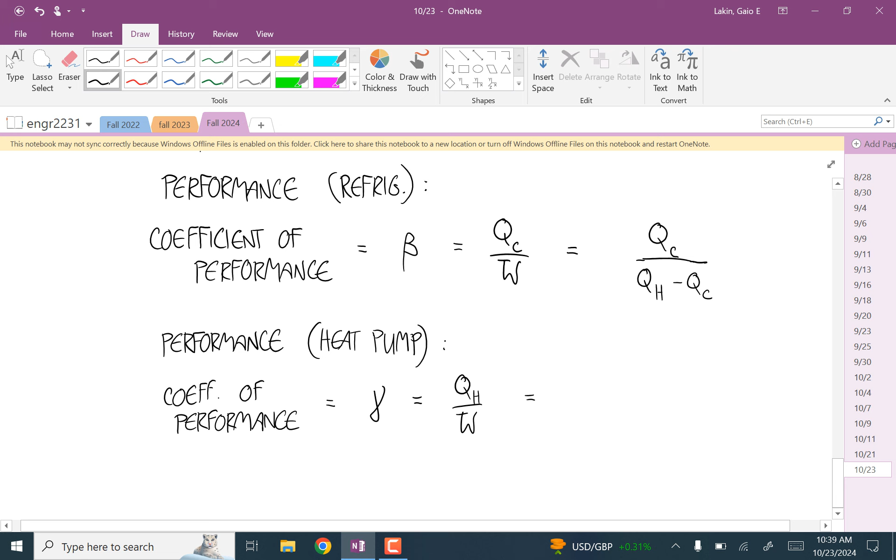And how would you define performance for a heat pump? Well, it's similar, except now the thing you care about is - you don't really care how much heat you pull from the surroundings. All you care about is how much heat you can dump into the room. So we're going to change it from QC over W to QH over W. Then substituting in from the first law, you can write this as QH divided by the quantity QH minus QC.

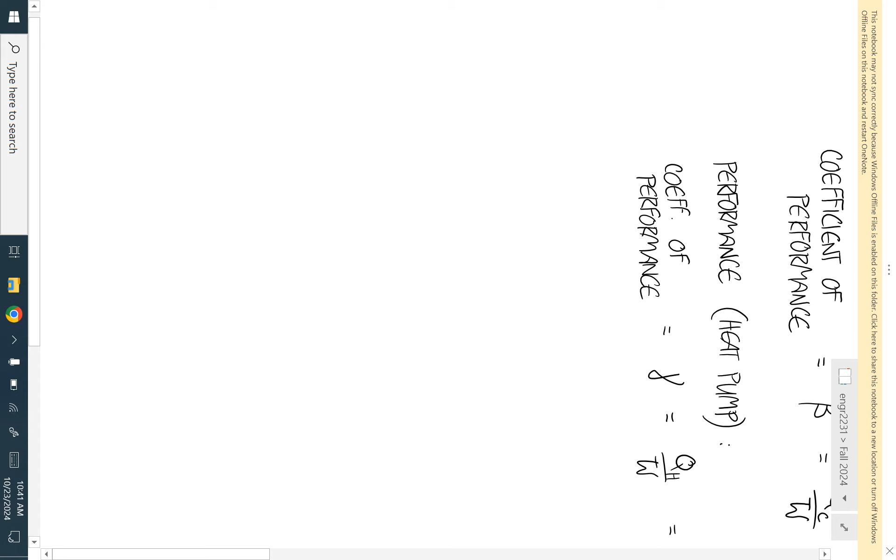Can you draw another gamma please? I'm just trying to figure out, because I've never done this one before. It's a backwards Y, is that sort of - oh, it's sort of like a chromosome, isn't that what a chromosome looks like? Yeah it is. Let's see what they look like typed. You know that's why Hulk is the way he is - gamma rays, gamma radiation. Yeah, I've never seen that before. Sometimes it feels like that's the biggest hurdle I've had to go over so far - learning the new alphabet, the old alphabet I guess. Yeah, if you take time knowing your Greek letters, people will always think you're smarter than you are. Thank you, yeah.

So these measures of performance allow us to put stringent limits on thermodynamic cycles - something reasonable, realistic, to compare our real world devices to.

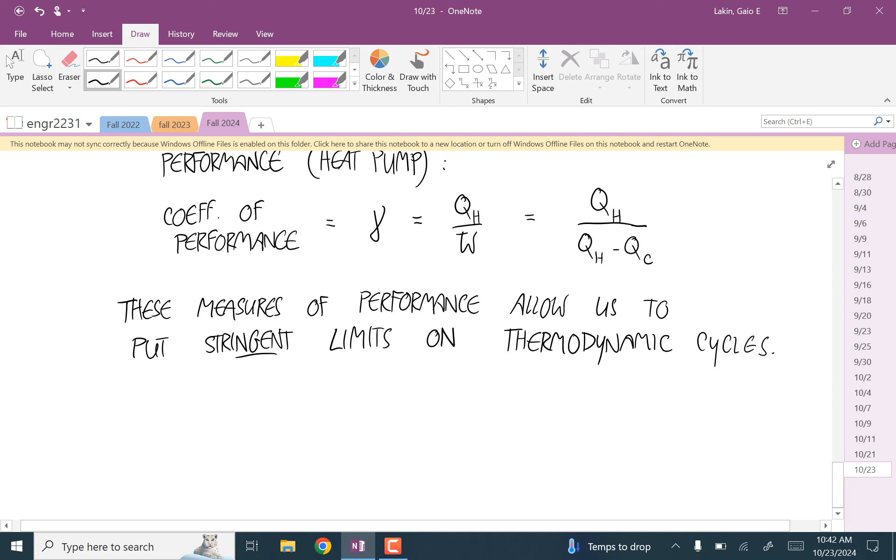So in order to evaluate real world cycles, we need to define reversibility - and irreversibility. Reversibility is like, overall you have a system that's reversible. Irreversibilities are talking about the inefficient elements in a device that are keeping it from being reversible.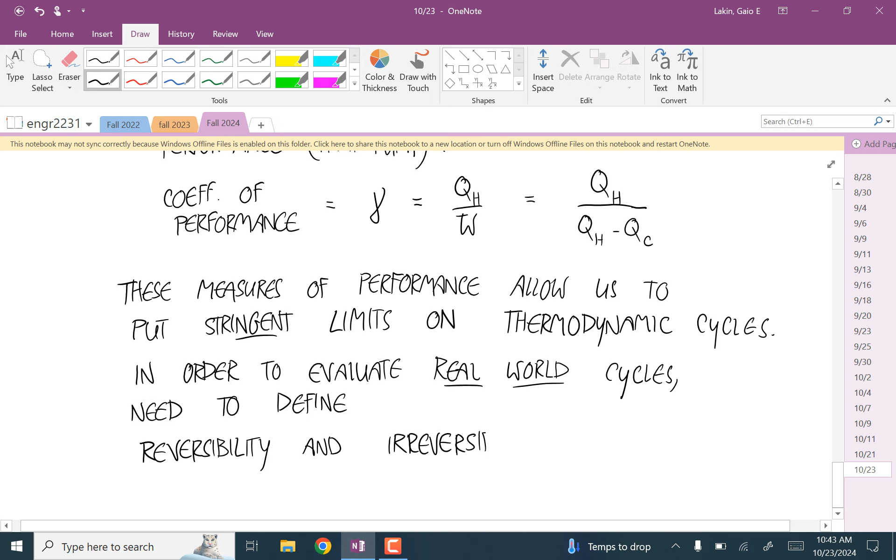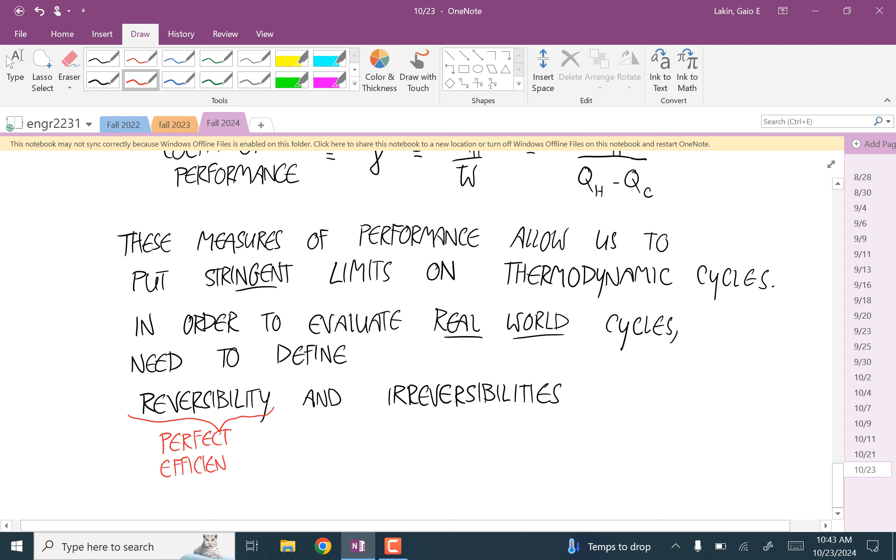So this is like perfect efficiency, let's say. Irreversibilities are things that cost energy, so friction is a good example of that. Going back to the skier going down the hill - you didn't talk about it this way in physics 1, but that is a reversible system if there is no friction between the skis and the snow. What that says is the skier could start at the top, ski down, get up to a certain speed, then turn around and use that speed to go right back up to the top. The system has been reversed - you haven't changed anything about the surroundings. So that's a reversible process, okay?

Irreversibilities - now if you add friction, the skier skis down the hill, gets to some speed at the bottom, goes around in his little loop, and there's also some friction there, and the skier gets a little bit up the hill, but not all the way to the top before all that energy is used up. Just keep thinking irreversibilities are like thermodynamic versions of friction, and friction is one of them, but there are other ones.

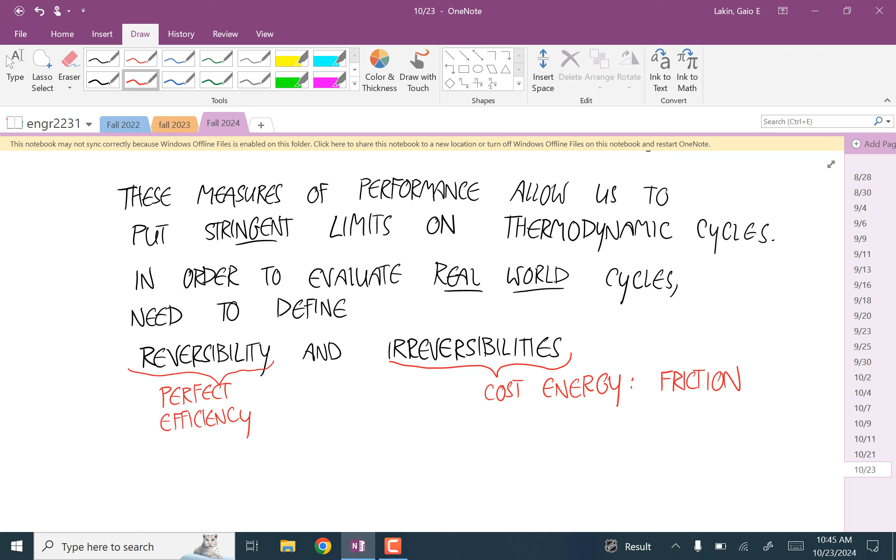That's momentum. If the momentum was the same, it's reversible. That is kinetic energy, which is a lot like momentum. I get what you're saying, yeah. Okay, so let's think about this.

So first, let's define a reversible system - a reversible process is one where the system and the surroundings could both be returned to the starting state.

Let's think about that in terms of the skier on the hill. So if the skier is on a frictionless hill, this skier can go down, ski around in a little loop, go back up the hill and make it exactly to the top. The skier has returned to the original position and the surroundings haven't been affected in any way. So both of those have returned to their original state, okay?

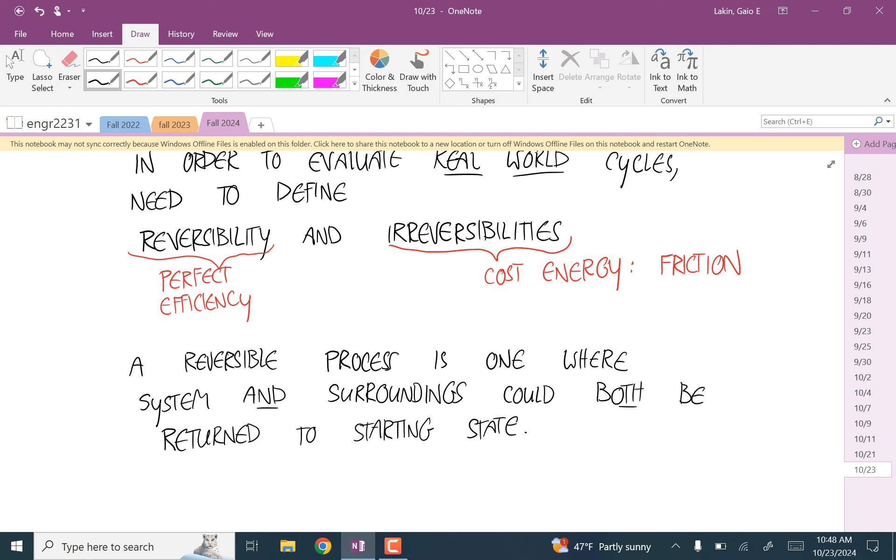Irreversibilities. And even if the skier was the one walking back up the hill, you're still changing the surroundings. Well, then you're either using chemical energy that's stored in the skier, or the skier is eating a sandwich as he goes and you're changing the surroundings. And he's probably a lot less efficient than a tow rope.

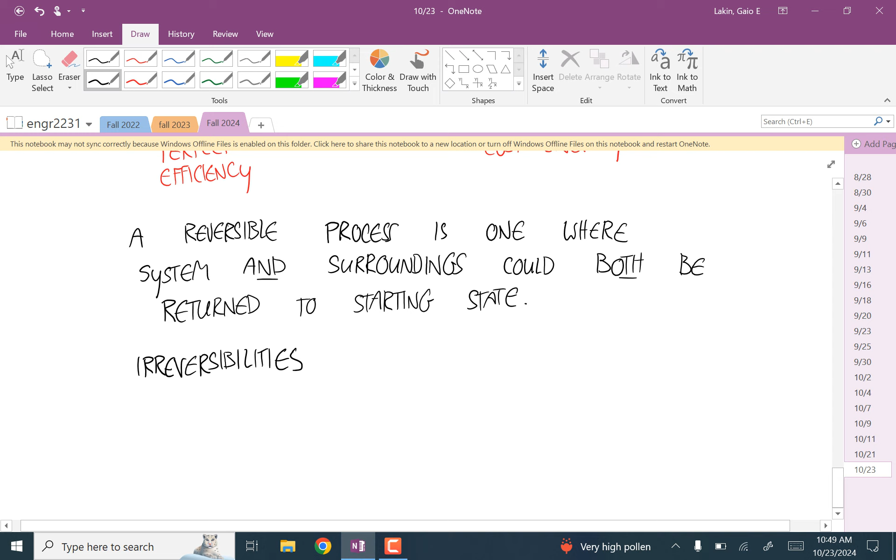Yeah, that's true. Yes, that is true. Have I mentioned this before? Anyone have any idea how much, in joules, how much energy you consume in a day? Let's say 2,000 - I think this is 2,000 calories. It's about 8 million joules. Wow, yeah, it's a lot. We're great. Yeah, imagine if we were bigger.

I don't know what a whale consumes. Oh, that would be insane. But it's got the buoyancy factor. Yeah, it's true. Ah, dang, I'll bet it's a lot less. Oh, but they need to - yeah, they probably need a lot to keep their body warm. I don't know, let's look into that.

But irreversibilities are all the things that prevent a process from being reversible.

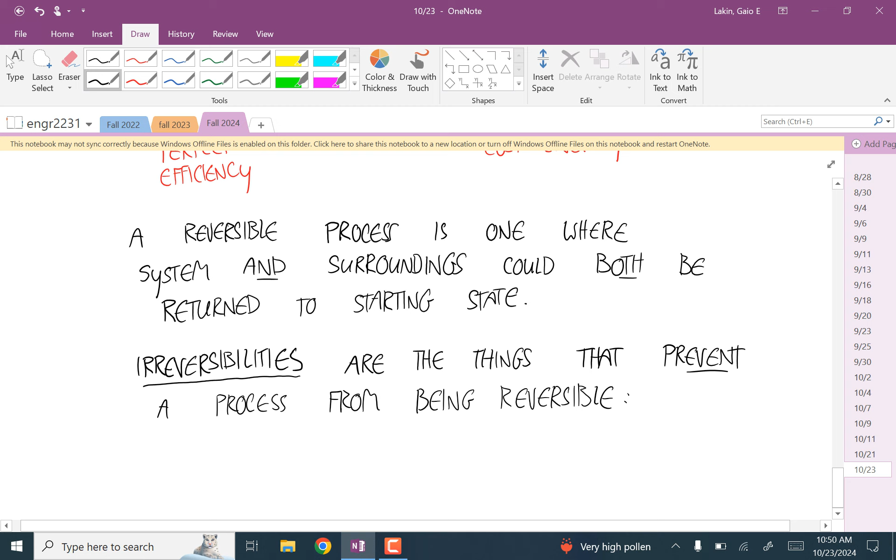So let me just give you this short list - there's 7 things here. Let me just get this in your notes. I think if you remember these 7 things, it pretty much covers all our bases for this class. Number one: friction or air resistance.

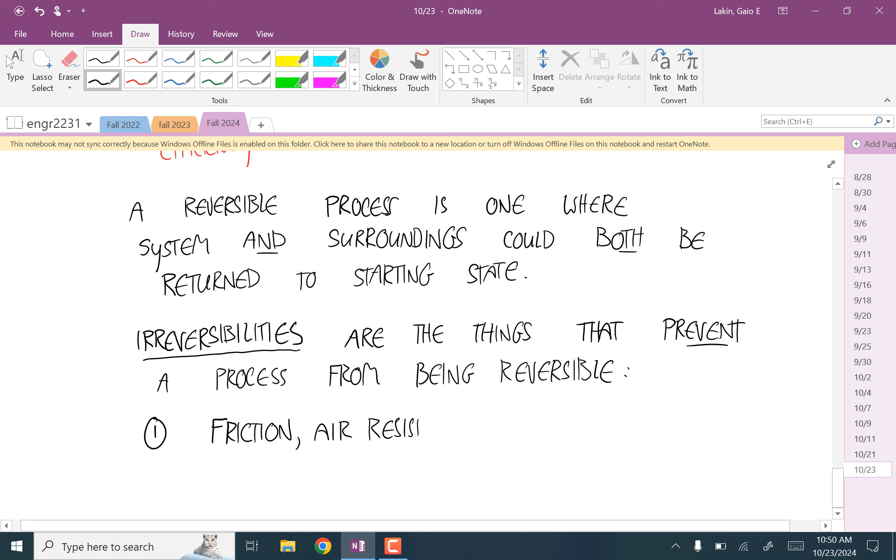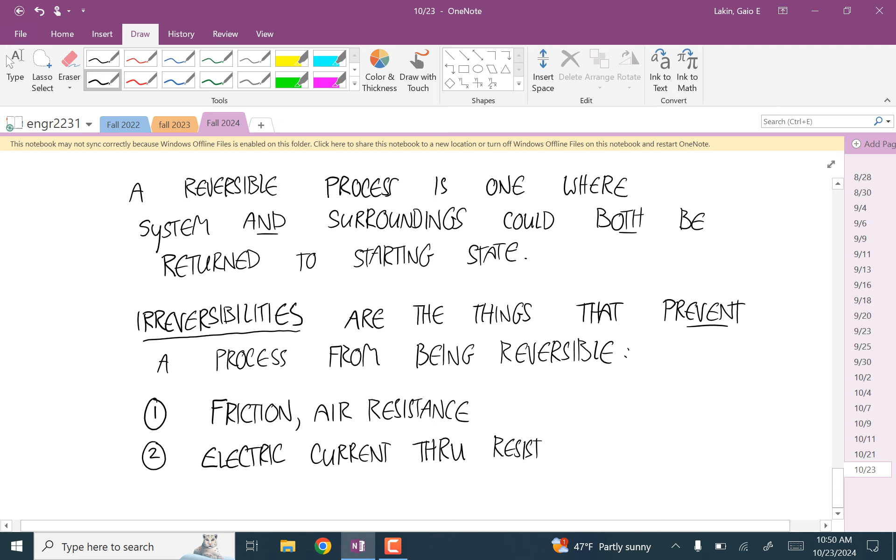Electric current through a resistance. Inelastic deformation.

So what is it that makes a deformation elastic? It returns to the same - yeah, exactly. When you remove the force, it returns to its starting state. So if you have a perfectly elastic thing, like a spring is pretty close to perfectly elastic, you can deform it. That's not an irreversibility, because when you remove that force, you get that energy back that you put into it. But it does lose a little bit of energy - everything loses a little bit of energy.

This is a big one: heat transfer through a finite temperature difference. Well, every temperature difference is finite. I mean, every actual cycle we're going to use has heat transfer through a finite temperature difference, so that's pretty unavoidable. But in order to have a perfectly reversible process, heat would have to be transferred through an infinitesimal temperature difference, which would take infinitely long.

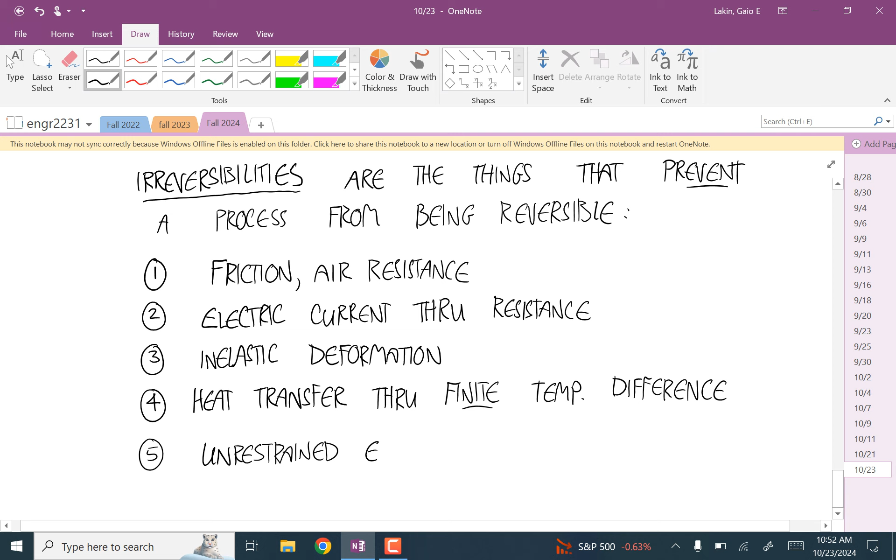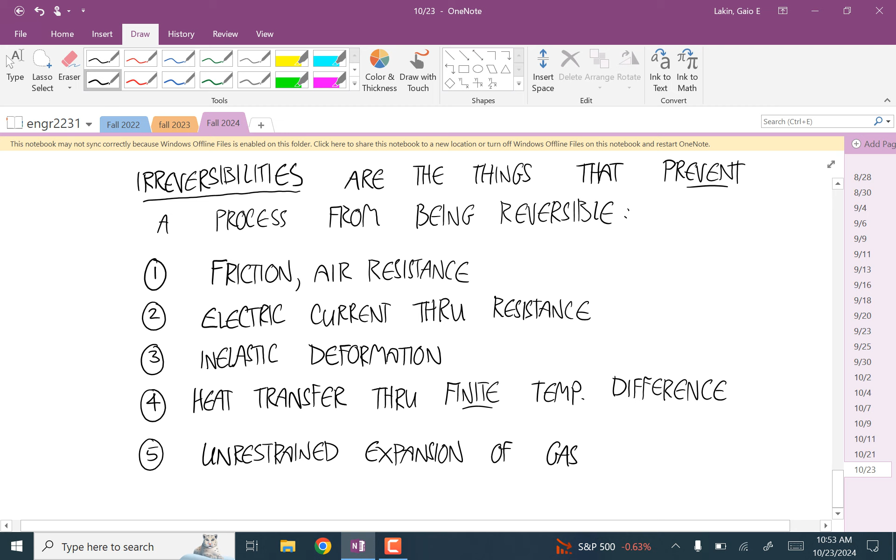5th is unrestrained expansion of a gas. The way to avoid this is to have gas expand in a piston cylinder system and keep it always in equilibrium as it expands.

6th, chemical reactions. And then last is mixing materials in different phases.

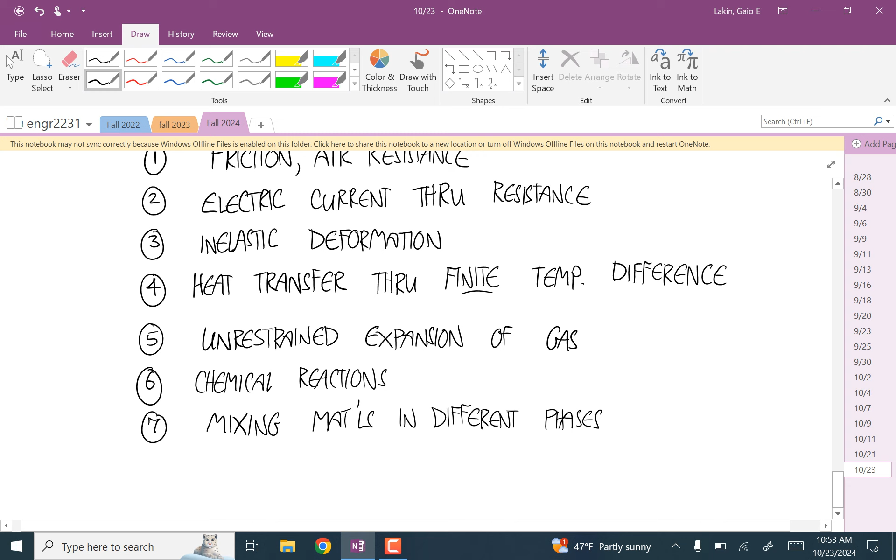Okay, so those are the 7 things to keep an eye out for. And a lot of what we're going to be doing coming up is just trying to figure out how to determine where are there inefficiencies in this system. How bad are they numerically? Is there any way we could correct it? That kind of thing. Anybody have any questions about this?